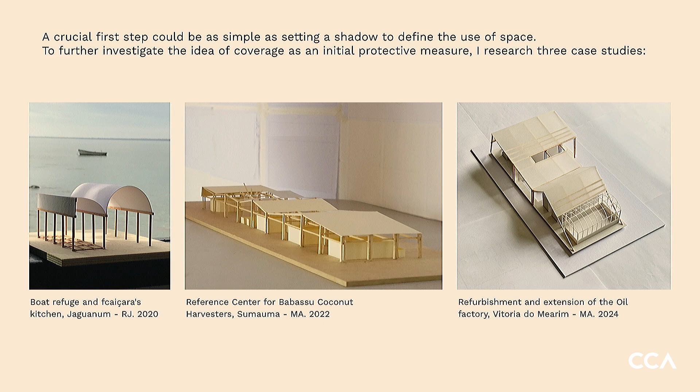So I will show 3 projects from the office: the boat refuge and Caiçara Kitchen in Jaguanum Island, the reference center for Babassu coconut harvesters in Sumaúma, in Maranhão State, and the refurbishment and extension of the oil factory in Vitória do Mearim.

I chose these 3 projects because there's a gap of about 2 years between each of them. Also, they have different construction conditions. For example, the first one, the boat refuge, reuses the original structure, the pillars and the bases. The second one is a completely new construction, and the third is the refurbishment and extension of an original construction.

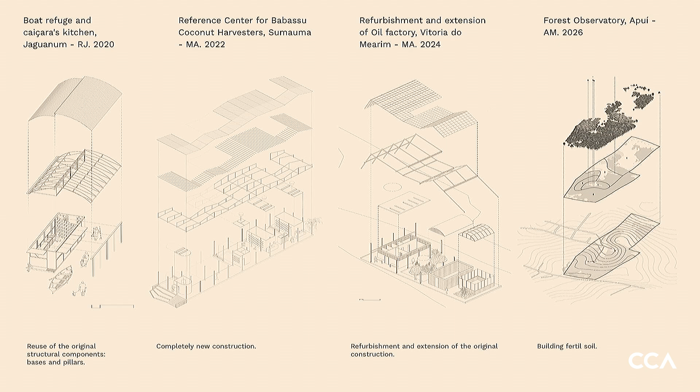I will also show a little bit about a project that is going on at this moment, where we work at a different scale, from the materials but also with the landscape.

So the boat refuge and Caiçara's kitchen is in Jaguanum Island. It's from 2020. This is the island where we worked, and this is the community, just a few houses, less than 50 families living there.

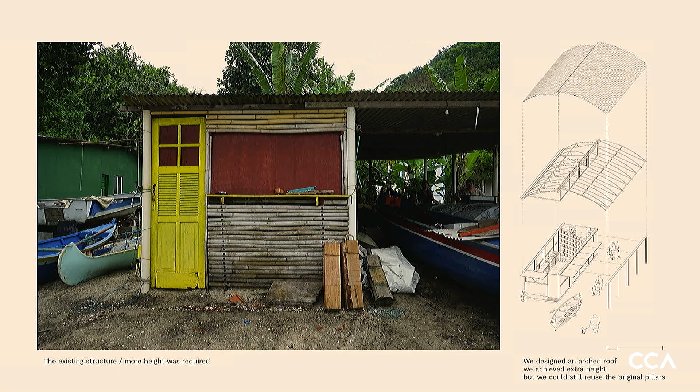So this was the original construction, the existing structure, and the space inside was really low and hot, really bad conditions to work there. Something we started to think when we came to this place is that the pillars and the bases were really good, so it's something we could use in the refurbishment, but the height was really low, so the idea was how to have more space while reusing the structure.

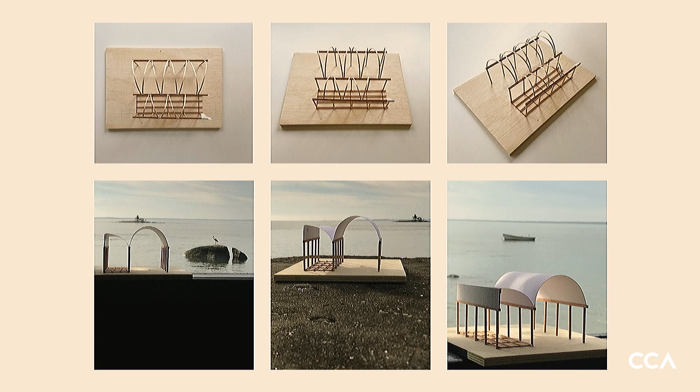So we worked with these models that gave us a way to understand what to do with the structure, but not just during the project, also during the construction, because what we think before starting construction doesn't always work during construction, so we used the model at these different moments.

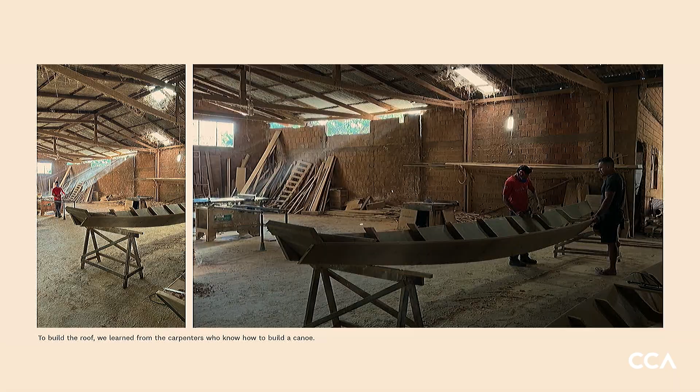To work with this new roof, we learned from the local community how they work with boats and how to build canoes. During construction we soaked the timber, and with that we were able to manipulate it, to create this arch with the timber.

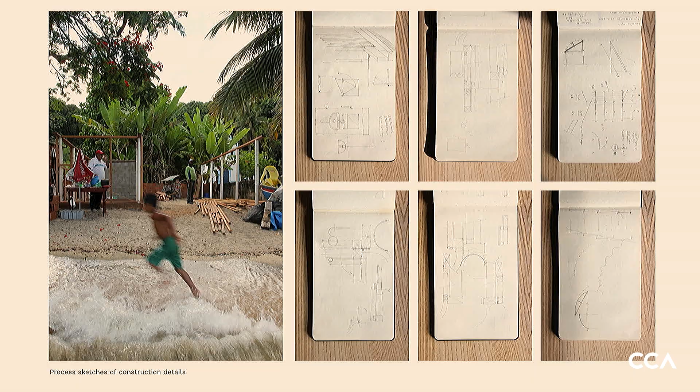These are some of the sketches during the construction, because many decisions related to the construction become part of the process during construction itself. For example, the number of tiles to have the least overlap between them, also the quantity of timber, all these things. We worked really closely with the carpenters during the construction.

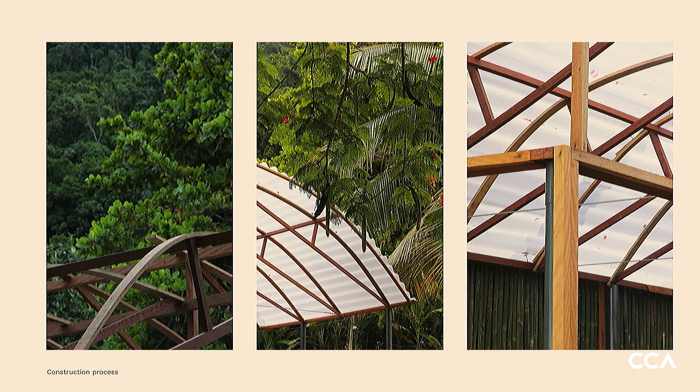These are some of the pictures also from the construction. As the space is for cooking, we worked with two layers, two panels. One is the bamboo panels that are open during the day when it's in use, and the other is a facade to keep this space free of insects while working inside.

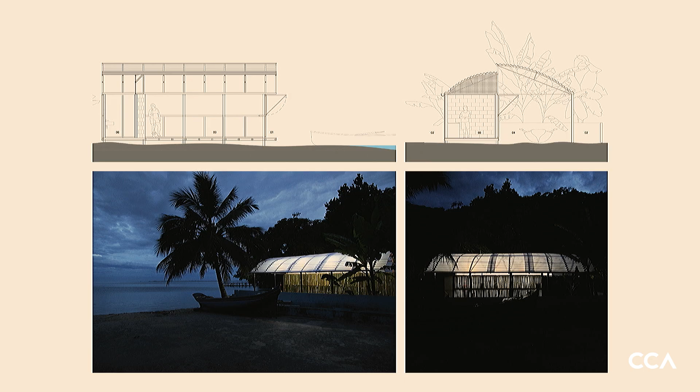That is how it looks during the day and also during the night. The project, though really small, also works at another scale, thinking about how to engage tourists on this island, to connect the community with the tourists and also with the environment.

The second project is the reference center for coconut. To work on this project, we had worked before with another community. This is in Maranhão state, in the north of Brazil.

But before that, we worked with this community that is about 2 hours from the other project that I'll show. At that point, this construction was a refurbishment. With these harvesters, we learned a lot about the process of working with these coconuts.

To propose these small new elements, like these tables and the workspace, we considered ergonomics, because they work many hours doing the same activities.

Also, in these projects that are workspaces, we consider that with just a few elements, we can turn the space into a place to connect the community, because this small village doesn't have cultural spaces or places to meet. So these places, where mostly women work, become the place to connect and bring the community together.

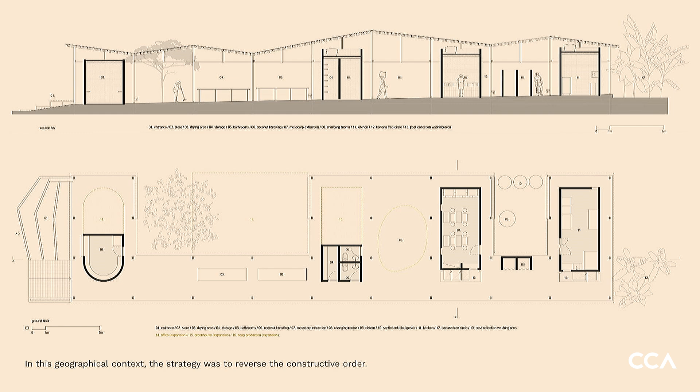So for us, the strategy was to invert the natural order of construction, starting with this big roof working like a big umbrella, to have a place to continue working on the construction also during the rainy season.

Also working with the carpenters and the locksmith, we designed the details to understand how to connect the timber, while also keeping it out of contact with the humidity.

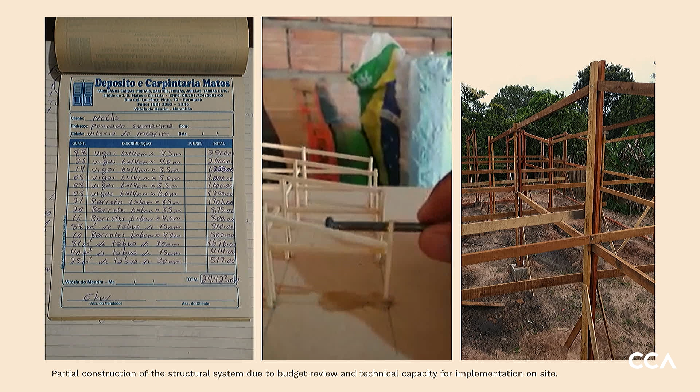The models became a tool not just for working on the project with the community, but also with the carpenters during the construction.

So this was the first step to construct this roof.

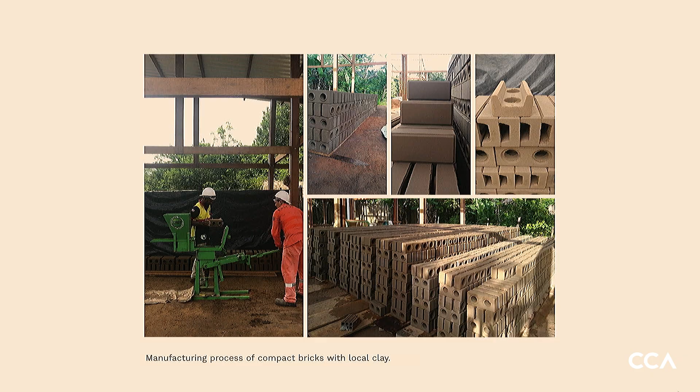Then we continued with the production of bricks, these compact bricks made with the soil of this region. That was when it started to rain. And finally, we constructed the different spaces.

So the roof, in this case, has two functions: one was for during the construction, but it also became something permanent during the use of the space, providing cross ventilation and shelter in this weather that is really hot the entire year.

When we finished the project, we realized that we exchanged more than 2,000 media files with the constructors, sharing information and ideas to make this construction possible.

This is how they use the space, working together. This is the main activity they have, breaking this coconut to obtain the kernel. It also becomes a place to meet with the community.

This is the refurbishment and extension of an oil factory. We started with this project last year.

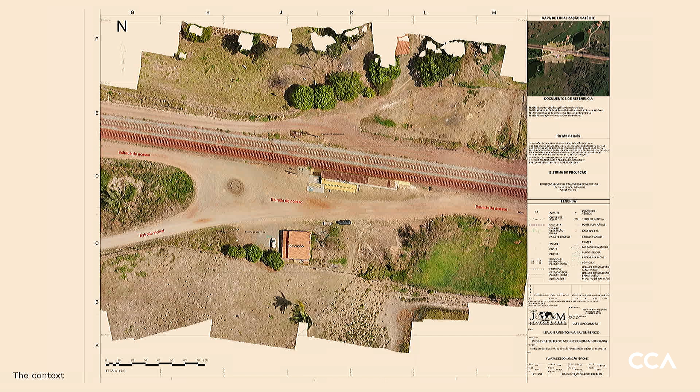So this is the area just in front of the train station. It's a really small space to design this extension of the project, but it's important for them to maintain the construction here because, for commercializing the products they work with, it's really good to be in front of the train station.

So we started again with these workshops, thinking together and also learning a lot because they have this knowledge about how to work with these programs. With that, we had the material to start thinking about the project, and also about the work routine, how they work.

The project is just at this stage, with the revision of the proposal.

In all of these cases, the shelter becomes an opportunity to work when we don't have a lot of resources, because we are working with the space in different scales and also in different conditions.

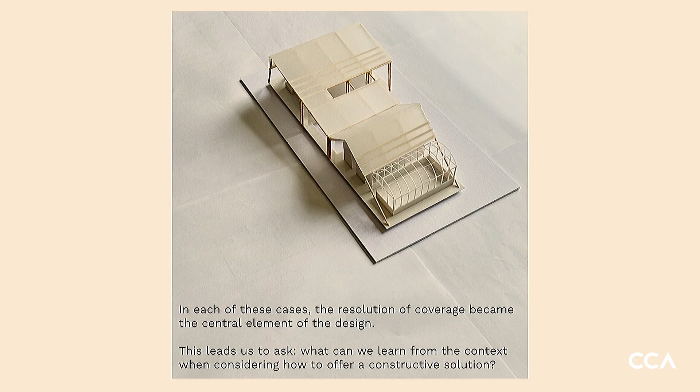This is something interesting to share about method, that we are starting to organize at the office: how work happens in these different biomes, working in different scales with the landscape, because in these villages or small cities, the communities have this relation with the environment, but also this relation between communities, working like a network. Also the scale of the space, and the detail, how work happens in these conditions, in these remote areas.

The model is always a really important tool for us, from the beginning, to understand the program, to share ideas in communication with the community, and also during construction, to have these steps organized and maintain all the material related to the project and how the project transformed during construction.

This timeline that I showed before, with all these inputs related to the geography, the weather conditions, the materials, to finally have the material for the construction.

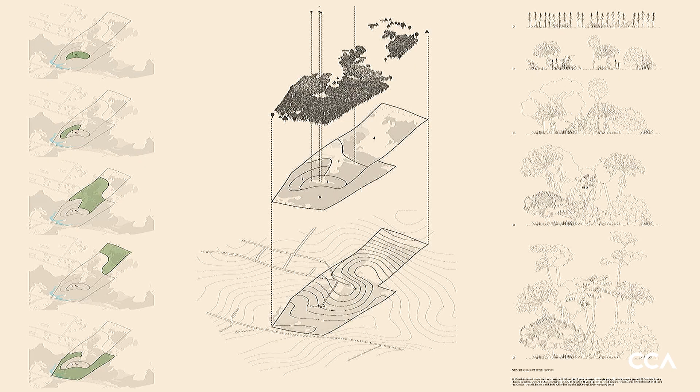With this land in Apuí, we are working in different layers, organizing a macro plan, working with permaculture to have the main construction, a center to show the possibilities related to this transition from monoculture to agroforestry, working with production to have incomes for the community in a short period, but also working with other species in different layers that become this agroforestry over the next years.

This other scale we are testing now is developing material with natural fibers: bamboo fiber, sugar cane, and açaí fiber. The idea is to develop this material from the waste, the parts of the plants that the local community doesn't use, and turn it into a new material that can be part of constructions.